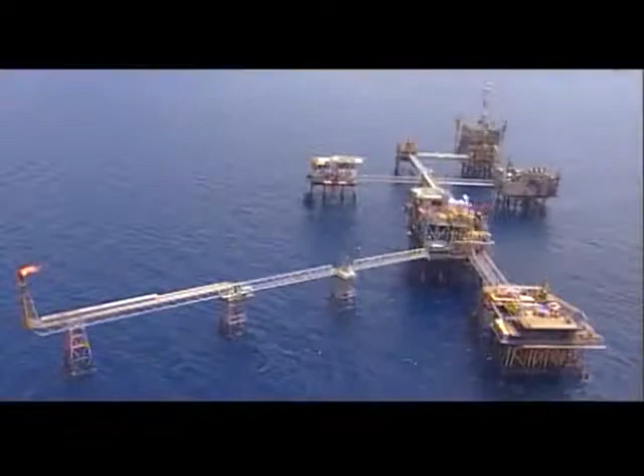Vietnam National Oil and Gas Group, Petro Vietnam, is assigned by the government of Vietnam to carry out the task of management and development of oil and gas activities on the entire territory of Vietnam and abroad. Over more than 35 years of operation and development, Petro Vietnam has continuously grown and become an international petroleum company with diversified operations in the full chain of petroleum industry, from upstream to downstream, both in Vietnam and overseas. In recent years, Petro Vietnam has made annual contributions of about 25 to 30% of the total state budget revenue.

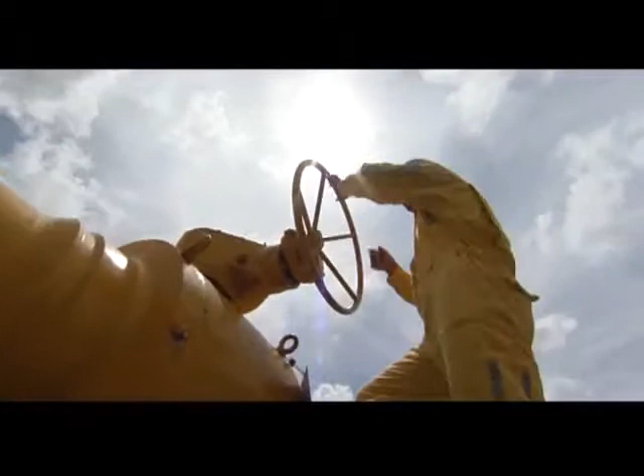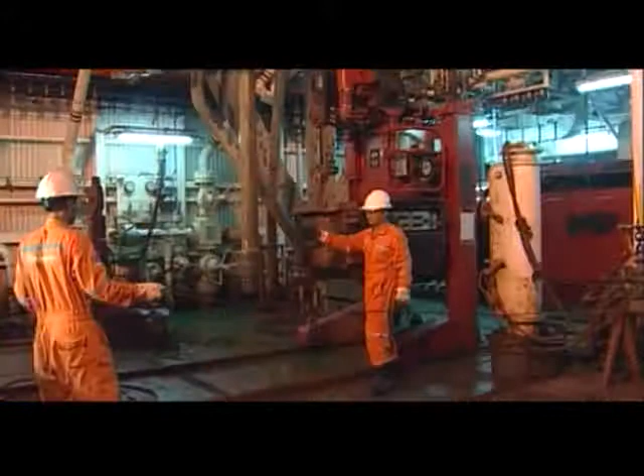The strength of the group is founded on passion, a desire for conquest, a spirit of persistence, hard work and the creativity of generations who have devoted their life with a burning determination for finding precious oil resources to enrich the country. Over 50,000 staff, with unity, strive to develop Vietnam's oil and gas industry comprehensively in all fields of activity, including oil and gas exploration and exploitation, the refining and petrochemical industry, the gas industry, power generation and high-quality petroleum technical services.

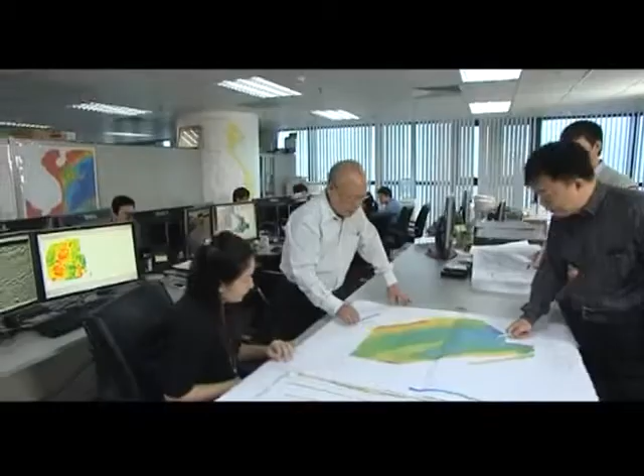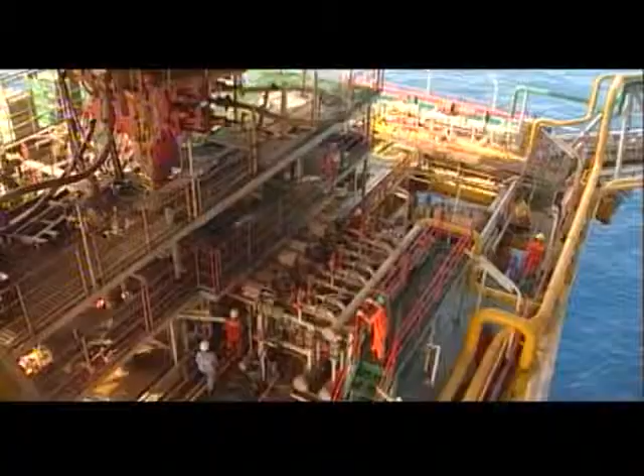Oil and gas exploration and exploitation, core areas. Speaking of the oil and gas industry, it primarily refers to exploration and production activities. This is the core business, creating a driving force for sustainable development for the oil and gas industry while providing a large source of revenue for the country.

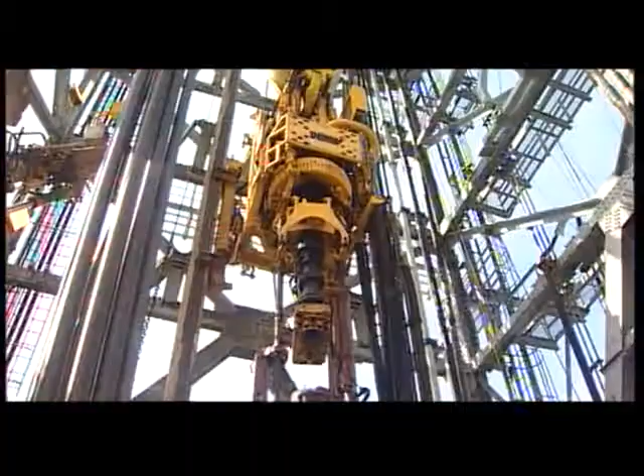Exploration and production are focused towards the development plan of the Vietnamese oil and gas industry up to the year 2015 and direction towards 2025, which was approved by the Prime Minister. Petro Vietnam is working with international leading oil companies over the world such as Gazprom, ExxonMobil, Chevron, Total, Petronas, PDVSA, etc., to carry out the exploration and production activities in country and abroad.

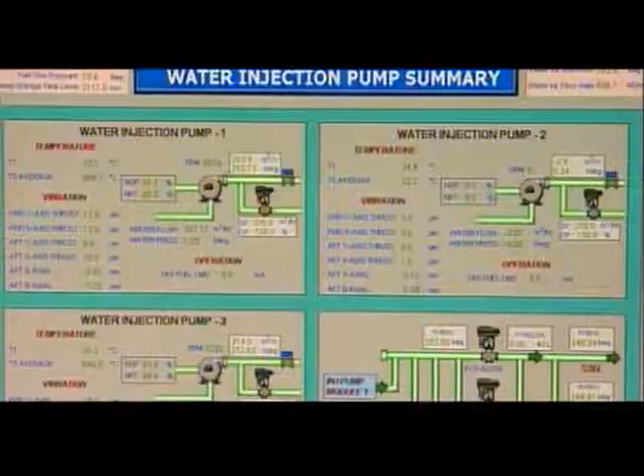At present, Petro Vietnam is implementing 65 petroleum contracts domestically, 20 contracts internationally in 14 countries, while producing oil and gas from 20 fields in-country and 5 others in its overseas projects. In the period 2011 to 2015, Petro Vietnam continues to push up exploration and production operations within and outside the country, striving to increase the recoverable reserves by 35 to 40 million tons per year and the annual production of 25 to 28 million tons of oil equivalent.

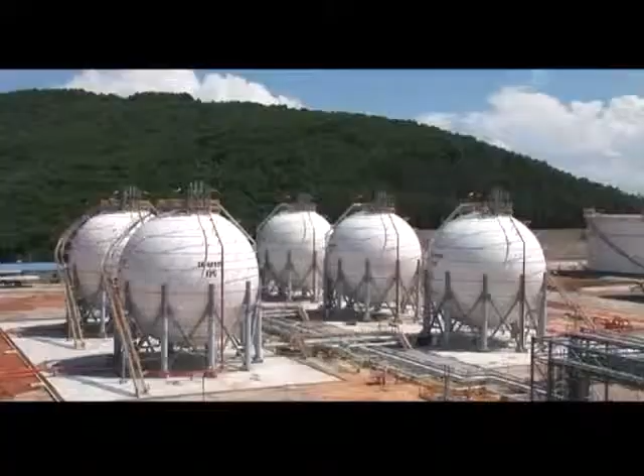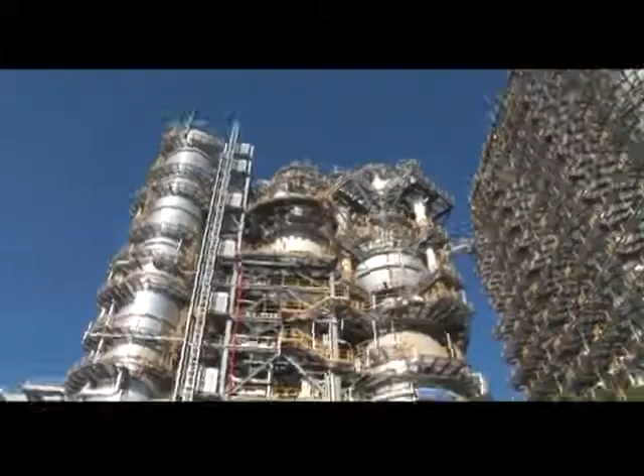Refining and petrochemical industry. Processing of oil and gas is one of the main business activities of Petro Vietnam, playing an important role for the comprehensive development and enhancement of Petro Vietnam's competitive position in the international arena. Petro Vietnam is actively accelerating the refining and petrochemical projects and production of biofuels in order to meet the basic needs for petroleum and petrochemical products and raw materials in the country.

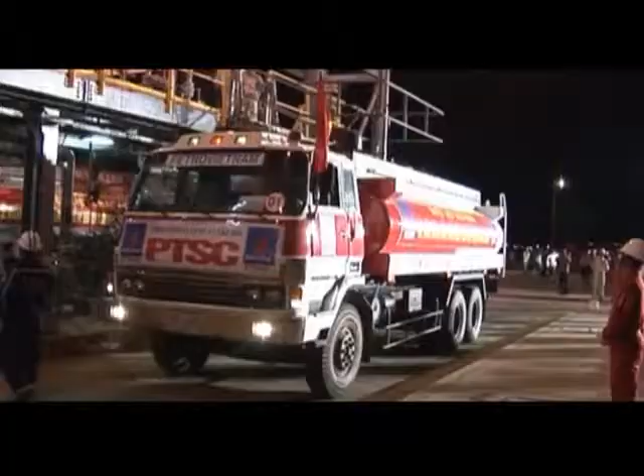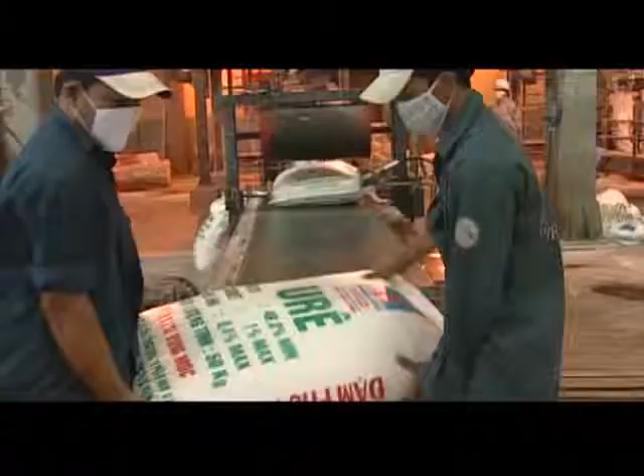Dung Quat Refinery, the symbol for Vietnam's refining and petrochemical industry, was put into operation in 2009 and currently meets 30% of domestic demand for petroleum products. The Phu My and Ca Mau fertilizer plants, with total capacity of 1.6 million tons per year, annually meet 70% of domestic demand for urea, which is an important contribution to ensuring the food security and the independence of the country from foreign nitrogen sources.

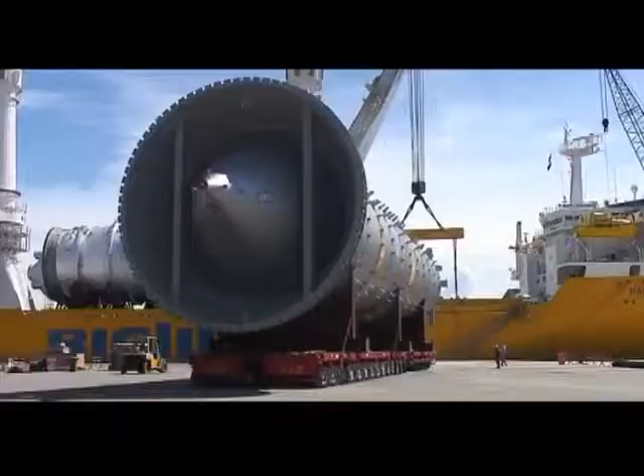The projects of Dinh Vu synthetic fiber plant, Nghi Son oil refinery and petrochemical complex, the Southern Petrochemical Complex, Long Son refinery, and several biofuel projects are also being actively deployed by the group to put into operation as soon as possible in order to meet the growing demand for fuel and petrochemical raw materials, contributing to reduce the trade deficit of the country. Gas industry.

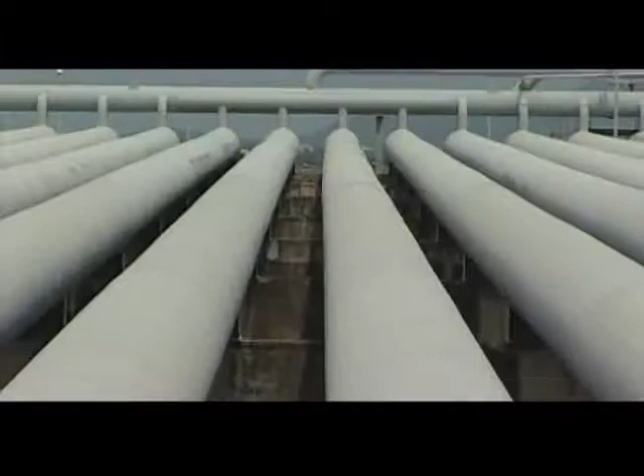Gas is a clean energy resource and accounts for an increasing proportion in the primary energy structure of Vietnam. Petro Vietnam has been operating and deploying many large-scale gas projects to meet the needs of gas for key consumers such as power plants, fertilizer and chemical plants, low-pressure gas industrial consumers, transportation and civil activities.

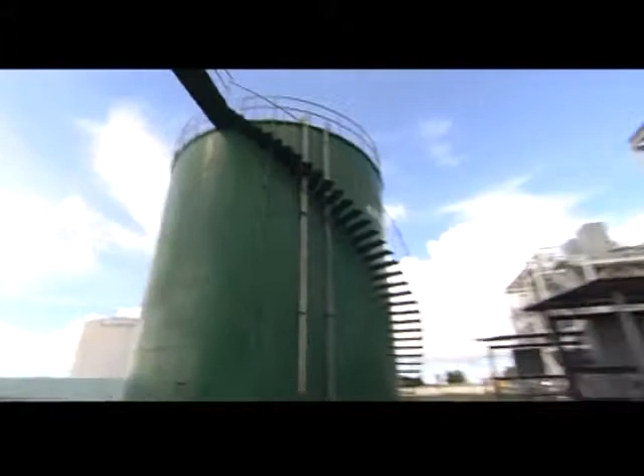Since the completion of the Bach Ho - Ba Ria pipeline system in 1995, the first gas flow was brought ashore, providing Ba Ria power plant with gas with a capacity of 1 million cubic meters per day, which has continuously increased over the following years by expanding the pipeline system of Ba Ria - Phu My, Dinh Co gas processing plant, the LPG storage and port in Thi Vai, and gas distribution stations.

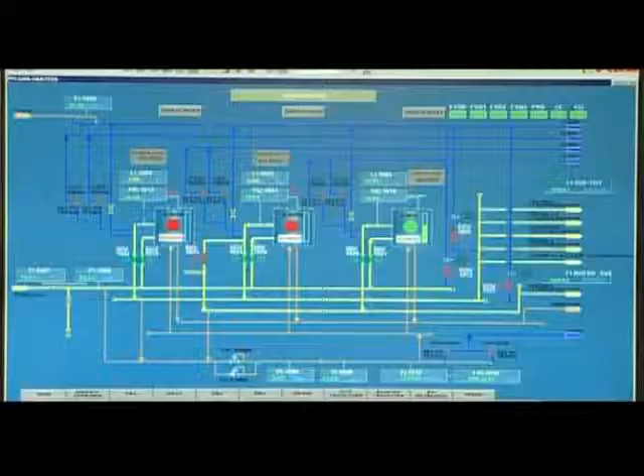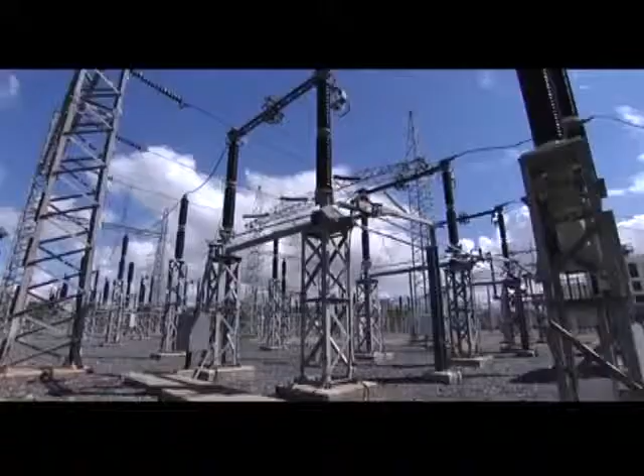In 2002, the Nam Con Son gas pipeline system, including the gas pipeline, Dinh Co gas processing station, Phu My gas distribution center, and pipeline from Phu My to Ho Chi Minh City, was completed, providing additional gas to power plants in Phu My, increasing the total gas supply up to 7 billion cubic meters per year.

In May 2007, the PM3 CAA Ca Mau gas pipeline system was completed and put into operation, supplying gas for Ca Mau power plants, increasing the total gas production and supply to about 8 billion cubic meters per year. So far, the total amount of gas onshore reaches more than 9 billion cubic meters per year, meeting the basic household needs for gas.

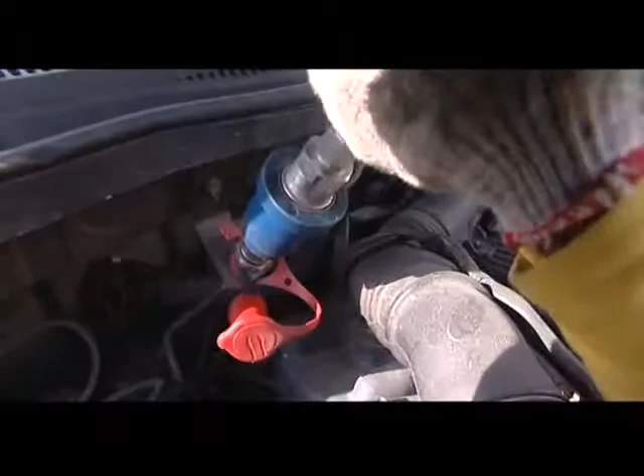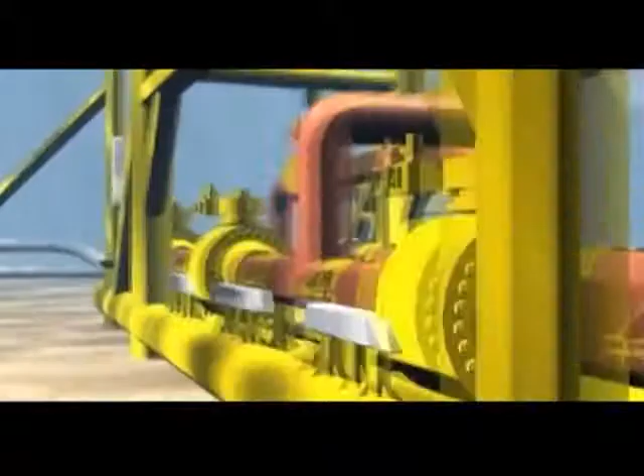In the future, to complete the goals set up in the Master Plan of Gas Industry of Vietnam by 2015 and direction towards 2025, which was approved by the Prime Minister, Petro Vietnam is continuing to implement the important infrastructure projects, including Gas Pipeline System Block B, O Mon and Ca Mau Gas Processing Plant, Nam Con Son 2 Gas Pipeline System.

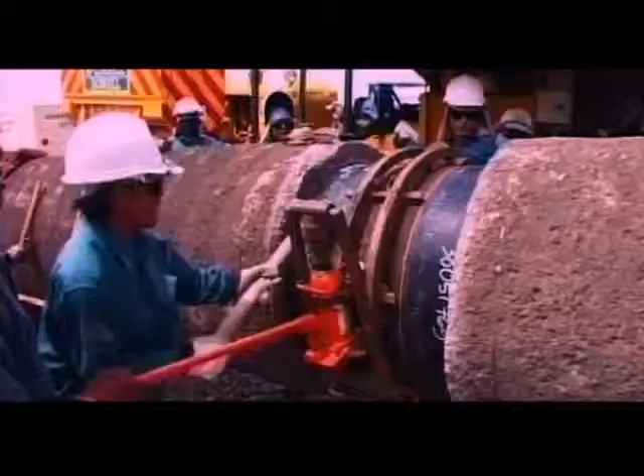Electricity generation. Investment in power generation sustains the investment in energy infrastructure, meeting the increasing power demand and energizing the economic development of the country.

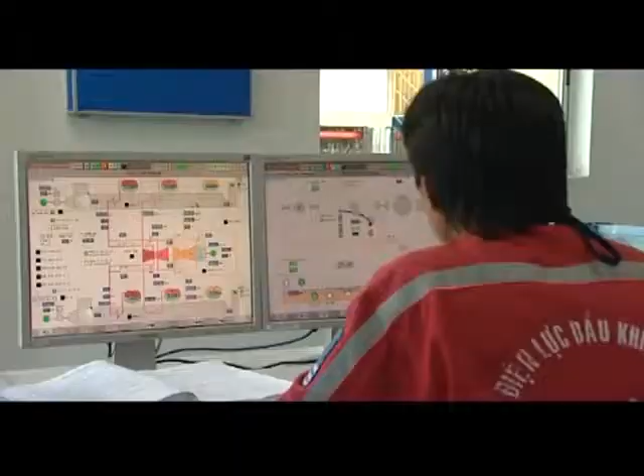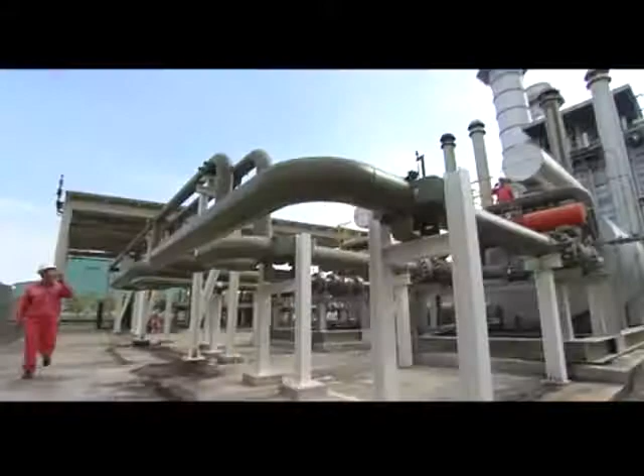Petro Vietnam is investing heavily in power generation and has become the second largest power producer in Vietnam. The current generation capacity of Petro Vietnam accounts for around 10 to 11% of total effective installed capacity of the country. Petro Vietnam has been responsible for the construction of 10 projects with a total capacity of over 9,000 megawatts.

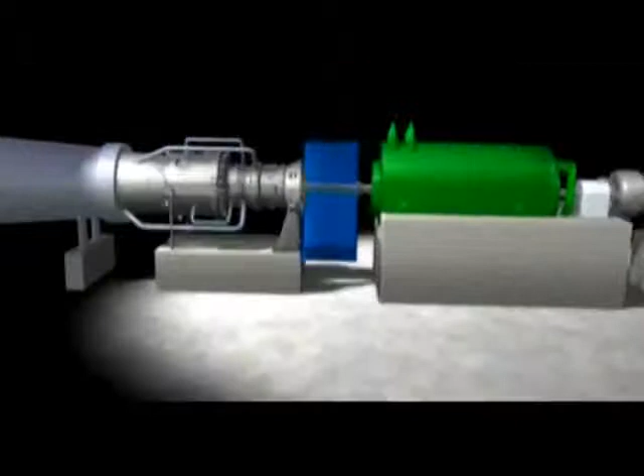The gas-fired power plants of Ca Mau 1, Ca Mau 2, Nhon Trach 1 and Nhon Trach 2, with a total installed capacity of 2,700 megawatts, have been operating safely, reliably and efficiently.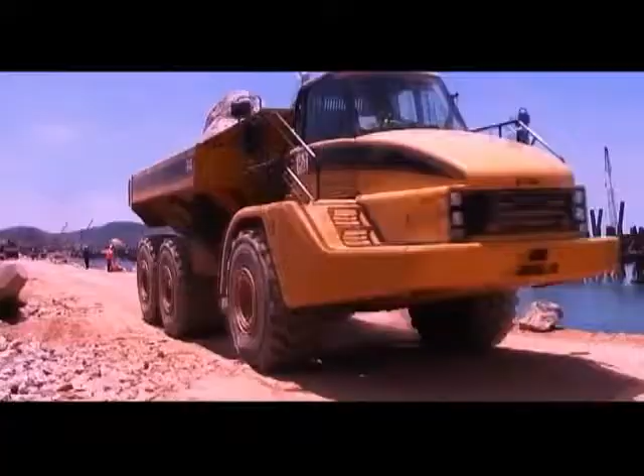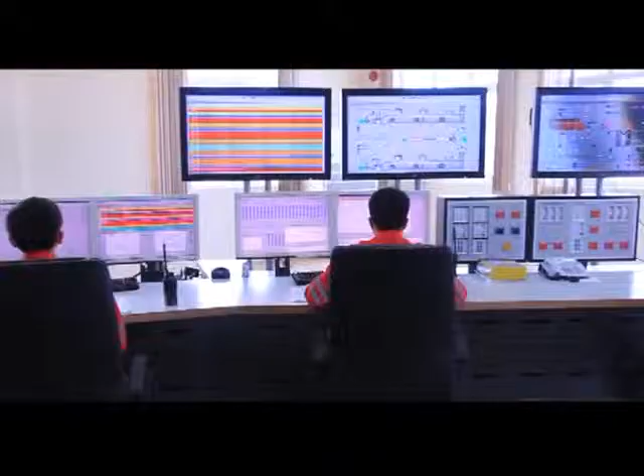In the meantime, Petro Vietnam continues to build other thermal power projects of Vung Ang 1, Long Phu 1, Thai Binh 2, Quang Trach 1, Song Hau 1, hydropower projects of Hua Na and Dak Drinh, and Phu Quy wind power plant. By the year 2020, the company strives to produce 15 to 20% of the total capacity of the national grid, contributing significantly to energy security and the development of the country.

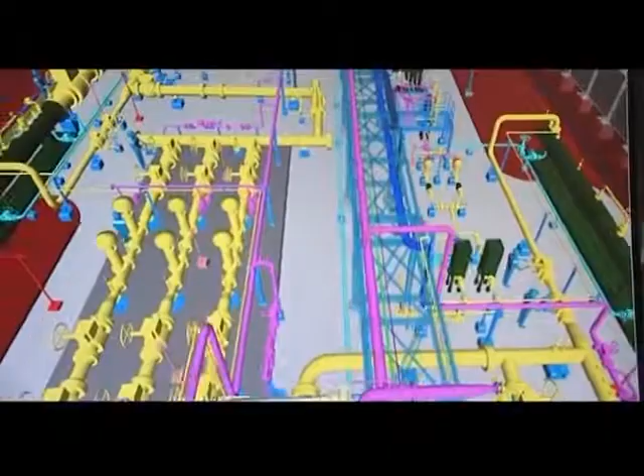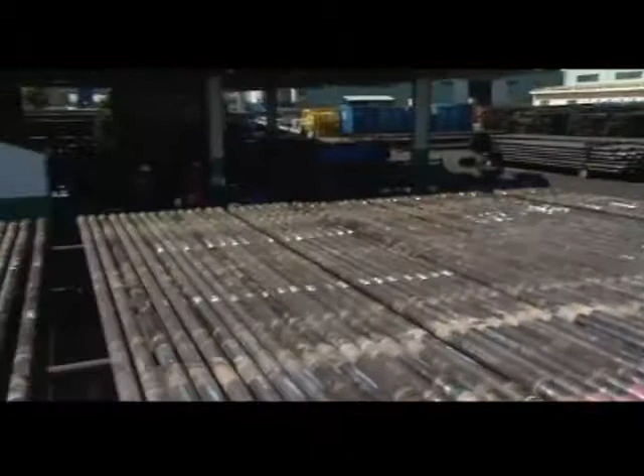High-quality petroleum technical services. The technical support services, which used to be provided by international service companies, have grown strongly and made significant contributions to the efficient implementation progress of projects, accounting for a greater proportion in total revenue of the group. In recent years, revenue from the oil and gas service sector has occupied about 30% of the total revenue of Petro Vietnam. We are proud that we have mastered this field and are trusted by foreign partners.

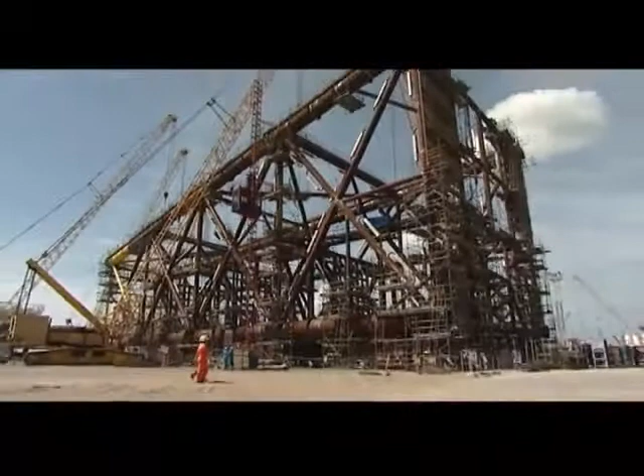The high-quality petroleum technical services have received intensive investment, including general surveying, technical services for exploration and production, transportation, storage, supply and distribution of petroleum products, operation and maintenance of oil and gas installations, design, construction and installation of petroleum and electricity structures, shipping and logistics services, etc.

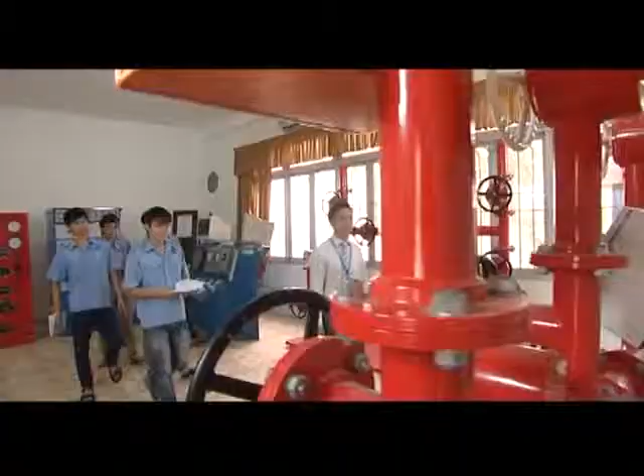Training and development of human resources and science and technology. Following the development strategy, Petro Vietnam carries out comprehensive training programs to accompany the development strategy of the company. Training is carried out across the main areas of leadership and management, leading professionals, science, technology, and project officials and engineers in order to meet three goals: towards modernization and professionalism, towards globalization, and towards the future cultural heritage of the petroleum industry.

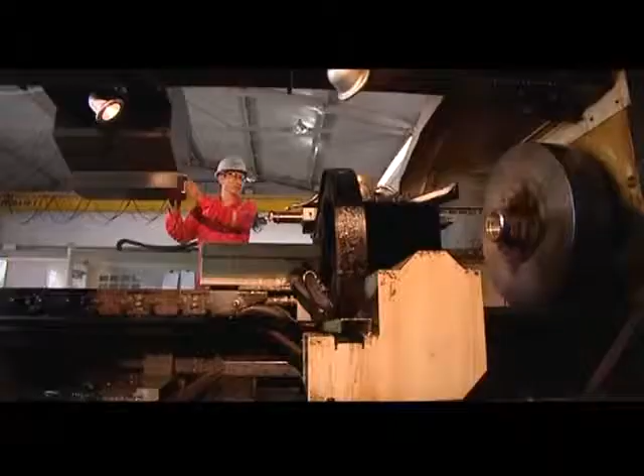The establishment and development of Petro Vietnam is associated with the scientific research and technological development of the group. Its many scientific and technological achievements in Vietnam's oil and gas industry have contributed to the image of Petro Vietnam today. The most remarkable are the effective exploration and production of oil and gas in the pre-Tertiary granitic basement of the Cuu Long Basin on the continental shelf of Vietnam.

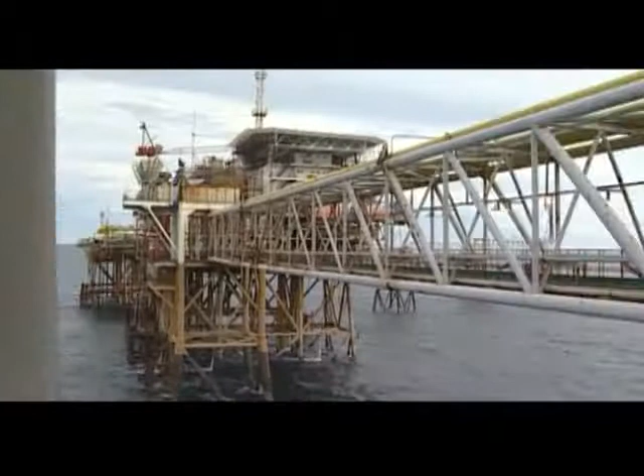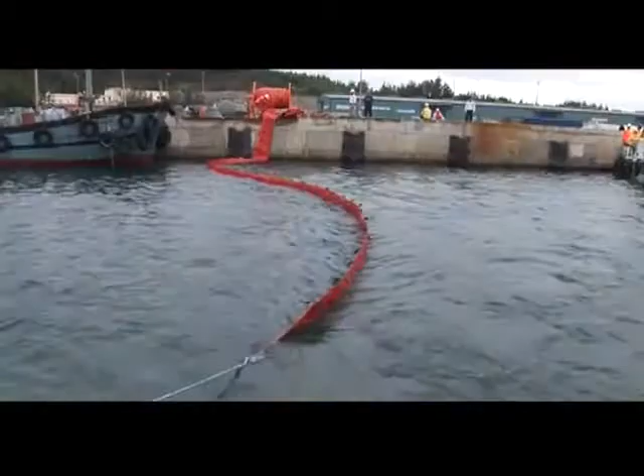Research and development activities are comprehensively implemented in all phases of its business. Environment, health and safety issues are a primary responsibility and concern of all levels of management in the daily production and business activities of Petro Vietnam. Petro Vietnam has been and will take all appropriate measures to mitigate and minimize the risks of harm to human health and life and of damage to property and the environment.

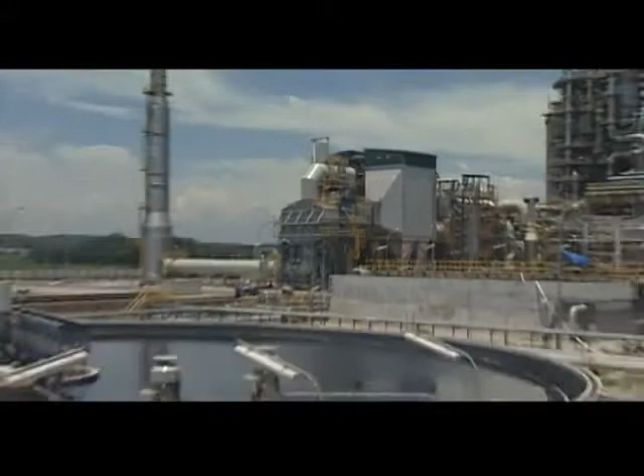Petro Vietnam has always committed and required all officials and employees to be aware of and fully comply with the environmental, health and safety policies in all activities, for the benefit of the community and all stakeholders.

Along with the development of oil and gas activities in the country, since the late 1990s, Petro Vietnam has been actively searching for and expanding its overseas investment. Currently, the group actively implements petroleum exploration and production projects in about 20 countries around the world, such as Russia, Venezuela, Malaysia, Algeria, Myanmar, Cambodia, Peru.

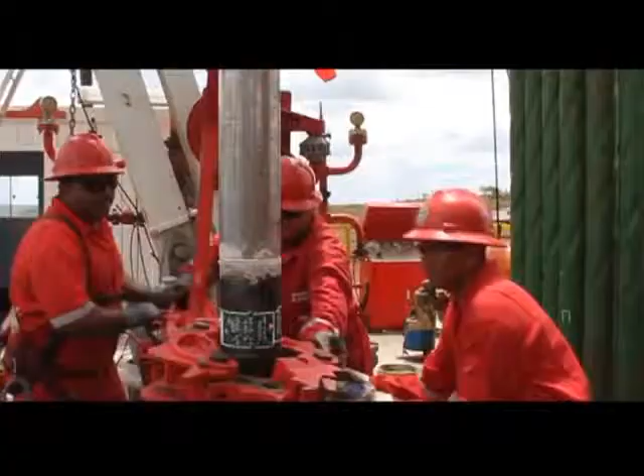Of which there are particularly large projects in scale and total investment operated by Petro Vietnam, such as Junin 2 oil field in Venezuela, Nenets in Russia, with early encouraging results in petroleum production, bringing reliable economic benefits for the group, as well as confirming the policy of reaching out across the open sea, contributing to the security of energy for the country.

Active participation in social work is the traditional beauty and culture of Petro Vietnam. In recent years, the average annual contribution by Petro Vietnam to social responsibility projects is over $30 million through a variety of activities to support education, building schools, health centers, and houses of unity and gratitude, supporting to overcome the consequences of natural disasters.

Social responsibility works funded by Petro Vietnam have contributed to changes in many rural and remote undeveloped areas, bringing happiness to many disadvantaged people. Petro Vietnam also extends love and sharing for the international community when natural disasters occur in countries around the world.

Proud of the achievements, Petro Vietnam is taking a strong step into the future with its vision towards 2025, to become the leading oil and gas economic group in the region, the pride of Vietnamese people.

The prestige of leading brands, trust of domestic and foreign partners, and above all, the efforts and skill, professionalism, solidarity and innovative spirit of the whole of Petro Vietnam's team of leaders, officials and employees is the key to opening up new opportunities and new success for Petro Vietnam in the development process of the country.